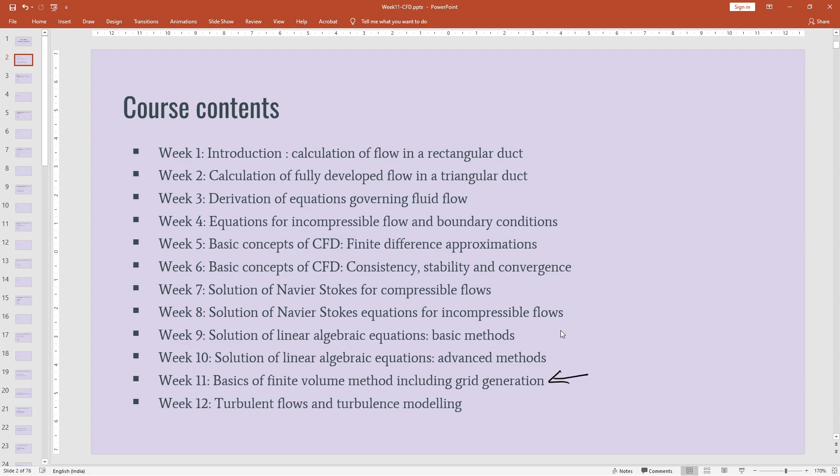Let's move on to questions. First question: for the solutions of Navier-Stokes equation in irregular geometries, which of the following grids can be used? Options are: first, Cartesian grids; second, structured grids; third, unstructured grids. Option A is both 1 and 2, option B both 2 and 3, option C all the above, option D only third one. You can inbox your answers.

Yes, the answer is right. We can use both structured as well as unstructured grids for Navier-Stokes equation for irregular geometries. So option B is the right answer.

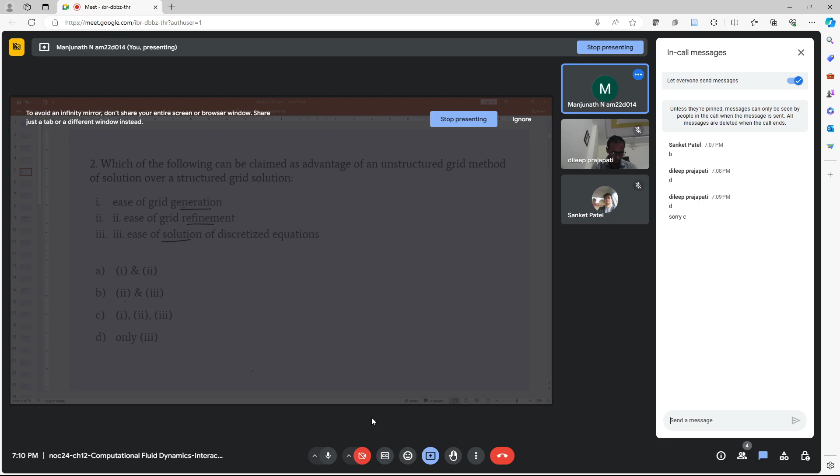So the three statements were ease of grid generation, ease of grid refinement, ease of solution. We have gone through the videos. For unstructured grids, ease of generation as such we can't say, but it's true to an extent that for irregular geometries, the grid generation will be difficult. But for other geometries, the unstructured grid can be easily generated, and also it can be easily refined.

But ease of solution won't be there, because even for a rectangular geometry, if I am using some triangulation discretization for 2D, for a 2D element, mostly it is triangular elements. So if we are using triangular elements for discretizing a geometry, for solving our algebraic equation, we will need some distances, some intercellular distances, and geometric properties from the mesh or cells taken into our system of equations.

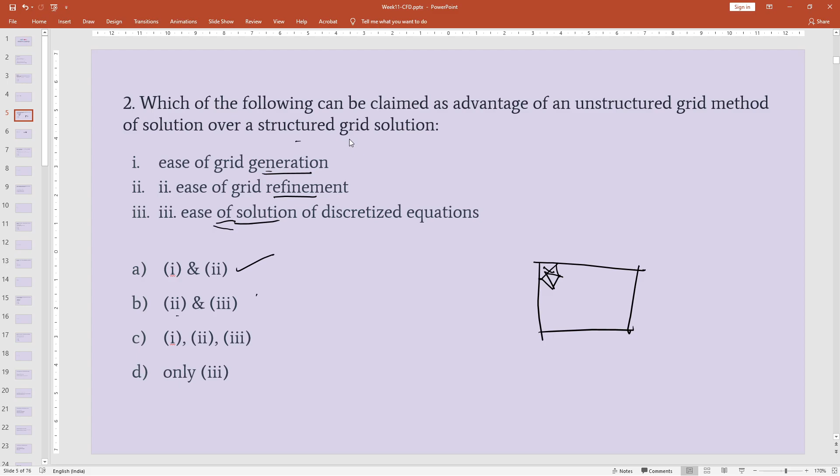Moving on to the next question: which of the following statements is not true when we use structured grid for flow through a complex geometry? The question is about finding a false statement regarding use of structured grid for a complex geometry. The statements are: first, body fitted grids can be used only on two-dimensional geometries; second, finite difference techniques cannot be used; third, the diagonal dominance condition of the coefficient matrix is preserved. Our options are: A, only third statement is false; B, both 1 and 2 are false; C, both second and third are false; D, all of the statements are not true. You can inbox your answers.

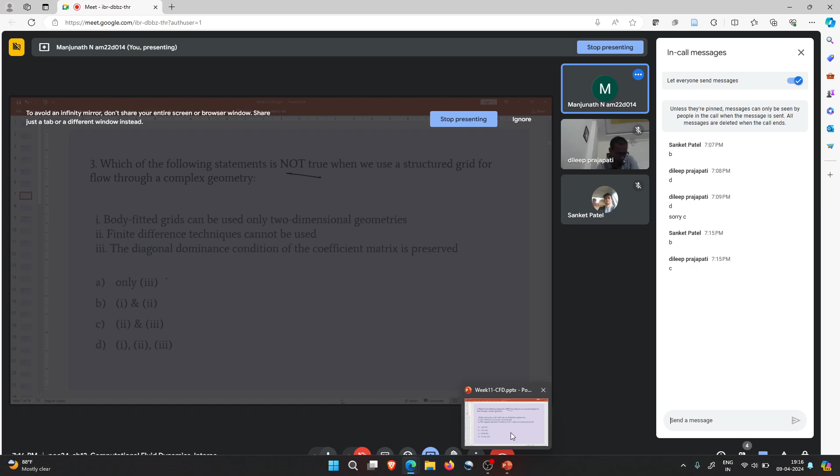Let's check the statements. First statement is body fitted grids can be used only on two-dimensional geometries. That is a wrong statement. We can use body fitted grids on three-dimensional geometries as well.

Second one is finite difference techniques cannot be used. It is not likely that finite difference methods cannot be used in any condition, but the issue is with the ease of generating structured grids that will match for finite difference techniques. So finite difference method can be used. Again, this is also a false statement. So 1 and 2, both of them are false statements.

The third statement is diagonal dominance condition of the coefficient matrix is preserved. So it is not preserved when we use body fitted grids. Initial generation of the coefficient matrix itself may not be diagonally dominant. We may have to do some preconditioning methods, something we have discussed last week, to make it diagonally dominant. So all of the statements are false. Our option is option D, that statements 1, 2, and 3 are false.

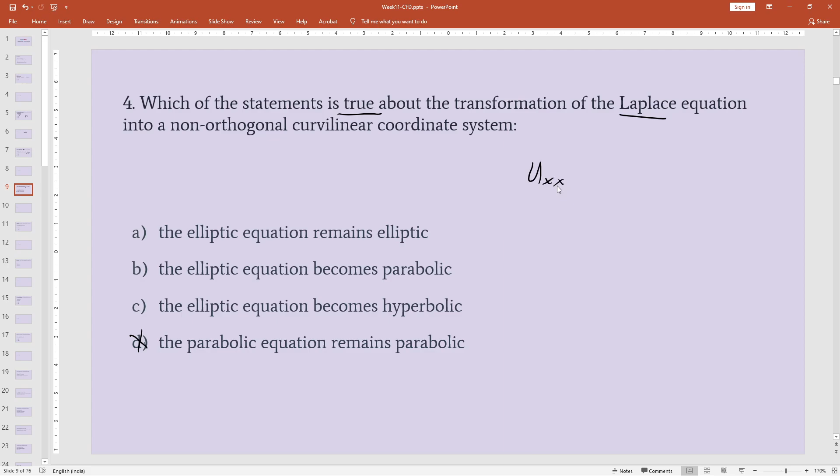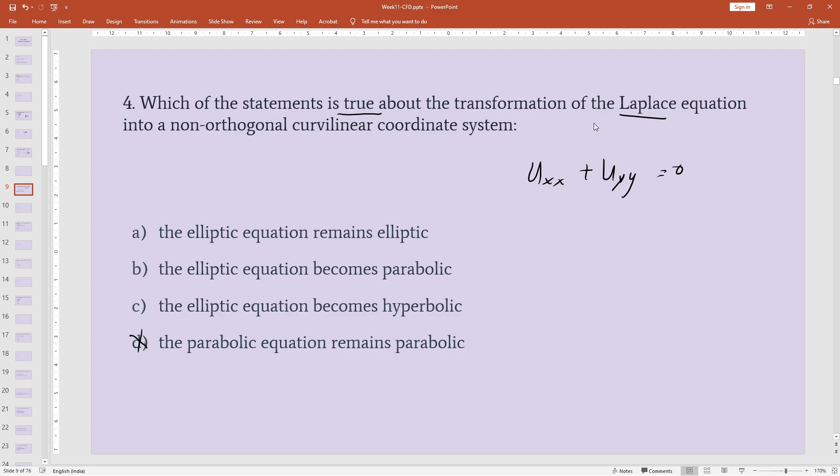Laplace equation, if you are taking in two dimensions, then uxx plus uyy is equal to 0. Even if you are transforming it into a curvilinear coordinate system, there won't be any additional terms or any first order terms coming to the equation. So it will remain elliptic. Our option A is the right answer.

Next question. Which of the following statement is true about ADI scheme, that is alternating direction implicit scheme? Statements are: it is an iterative method. Second statement, it requires diagonal dominance for convergence. Third statement, it can be applied to three-dimensional problems. So these are the three statements, out of which the question is to find true statements regarding ADI scheme.

Our options are: option A, first and second statements. Option B, second and third statements. Option C, first and third statement. Option D, all the three statements. You can inbox your answers.

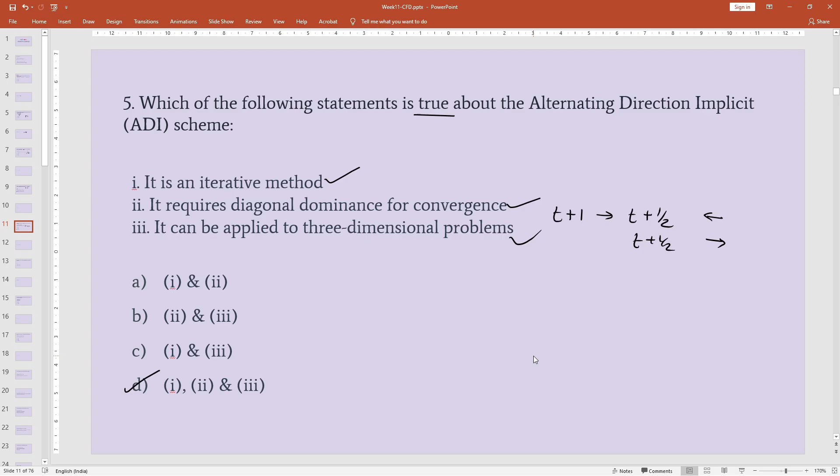Moving on to next question. For the solution of Ax is equal to B, which of the following decomposition of a matrix is the most implicit? So the question is about which decomposition is most implicit, that is, it will be having most number of terms in the current iteration steps. Options are LU decomposition, option B incomplete LU decomposition, option C LU plus N as in SIP,

So out of the three statements you can choose.

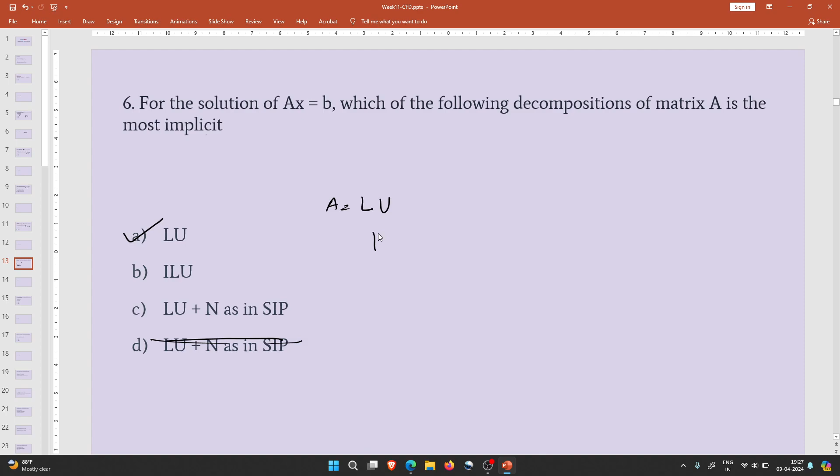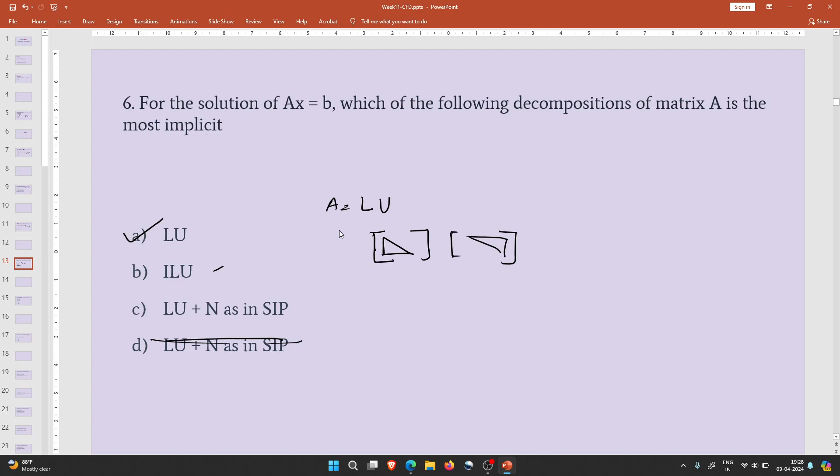Yes, you are right. Option A, LU decomposition method is the most implicit method where A is split into L and U, one lower triangular matrix and other upper triangle matrix. Here the number of elements in both L and U has to be solved. The number of non-zero elements will be greater, whereas in incomplete LU method, the number of non-zero elements are reduced.

Moving on to next question. The advanced iterative techniques are used primarily to enhance which of the following aspects of basic iterative methods? So the question is about why we need advanced iterative methods over basic iterative methods. Options are: to improve convergence condition, to improve convergence rate, and ease of computation. Which of these aspects are enhanced in advanced iterative techniques? Option A, 1 and 2. Option B, 2 and 3. Option C, 1 and 3. Option D, 1, 2 and 3. You can inbox your answers.

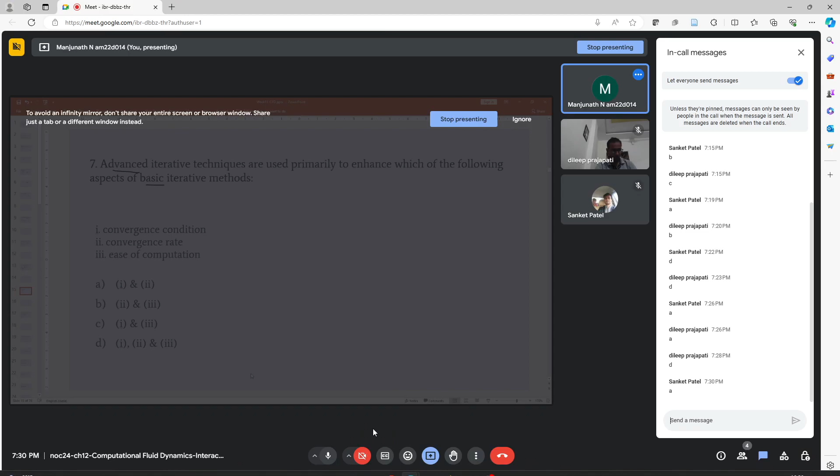So if you have gone through the videos, why we need advanced iterative methods, why we are iterating the solution, why we are iterating the system of equations. Iterating is to improve accuracy. Accuracy will be achieved if and only if the convergence is met. So our primary target is to improve the accuracy by improving the convergence.

So that's why we need advanced iterative techniques. But a lot of methods that we depend on for advanced iterative techniques, like preconditioning, and also some techniques use a lot of guesswork and some pseudo time loops. All such things will increase the computational process. So our primary target is to enhance the accuracy by improving the convergence. The first and second aspects are improved, while the ease of computation or the computational cost is something we have to compromise. So option A is our answer, that is 1 and 2.

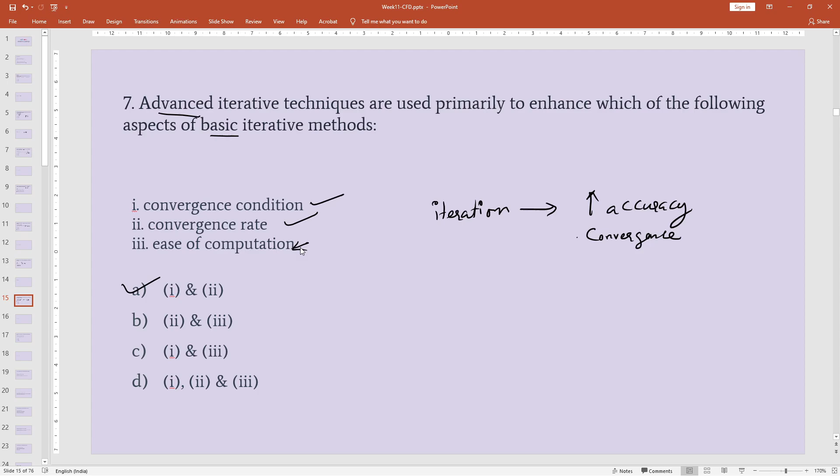Moving on to next question. Which of the following statements is true about multigrid method for solving Ax equals B? Statements are: it uses multiple grids for the same domain. Second statement: it uses multiple grids for the same equation. Third statement: it solves the same equation on all grids. Options are: first and second statement, option B second and third, option C first and third, option D first, second and third. We can look for answers.

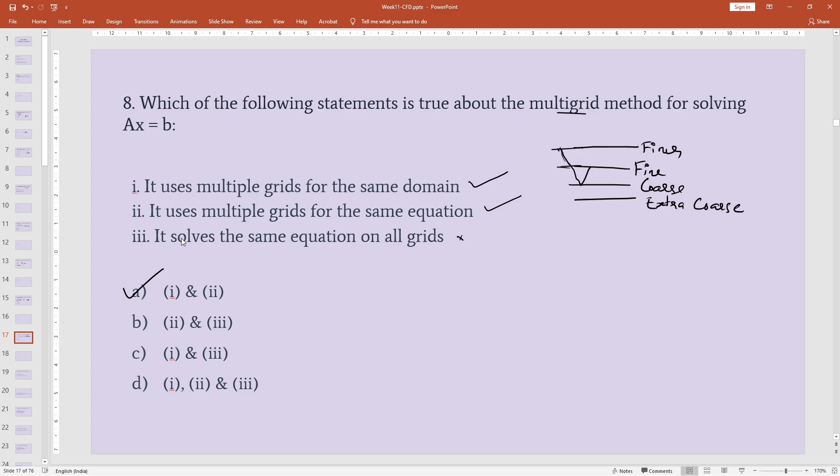Next question. In Delaunay triangulation method, the unstructured mesh generation is focused on which of the following? Options are: creating elements with good aspect ratio, minimizing the total number of elements, maximizing the volume of each element, or guaranteeing conformity with the computational domain boundary. So Delaunay triangulation method is the most used method for unstructured grid generation. So what is the principle behind Delaunay triangulation method is our question. You can inbox your answers.

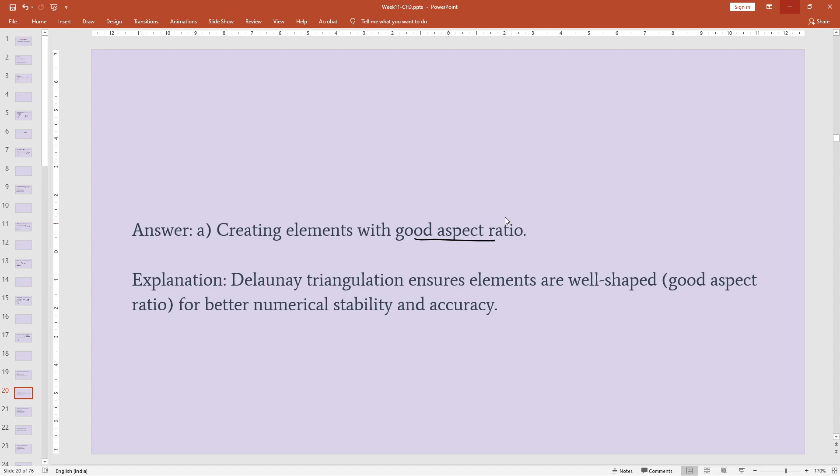In Delaunay triangulation, or why we choose triangles, we focus on creating triangles with good aspect ratio. The aspect ratio differs for different types of elements. If any side or geometrical proportion is way too skewed, it creates hurdles for the computational process. So a good aspect ratio is one of the required qualities for a mesh, and the Delaunay triangulation method ensures the mesh is refined for good aspect ratios.

Moving on to the next question. The advancing front method used for mesh generation is particularly useful for what? Options are: A, simple rectangle geometries. B, complex geometries with intricate boundaries. C, uniformly spaced grids throughout the domain. D, refinement of existing structured meshes.

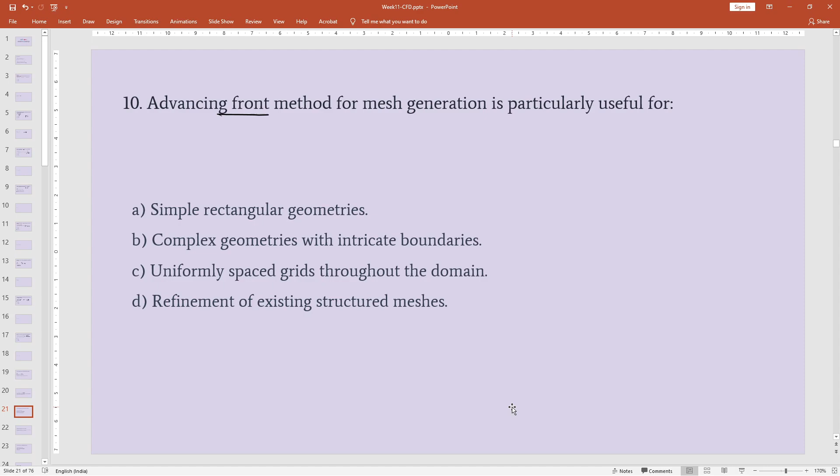Yes, you are right. The advancing front method can effectively handle complex geometries with intricate boundaries. The term itself denotes that it transforms or adjusts elements to conform to the boundary. It keeps adding or dividing elements until it is fully conformed with the complex boundaries. So such advancing front methods are well suited for complex boundaries or complex geometries.

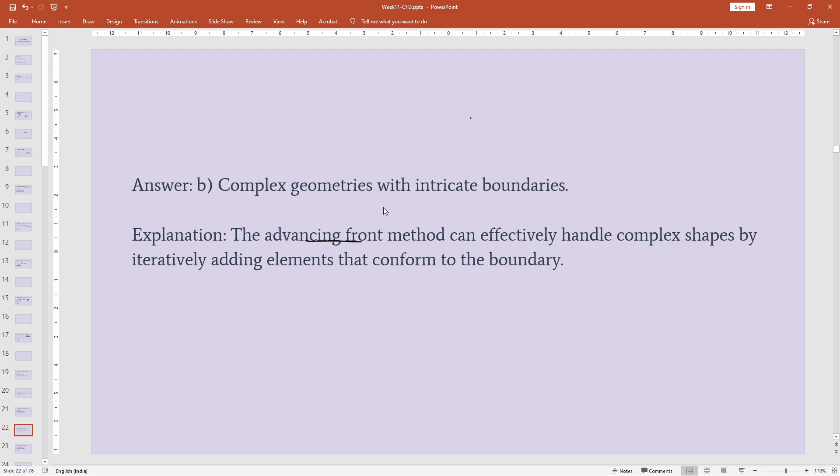Moving on to the next question. Octree-based methods for mesh generation are well suited for which of the following? Option A, generating highly anisotropic meshes. Option B, adapting the mesh based on the solution gradients. Option C, creating very fine meshes around small features. Option D, all of the above.

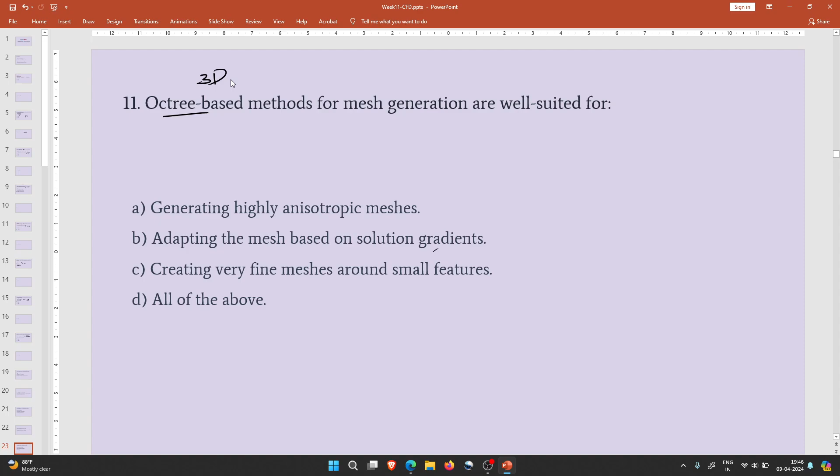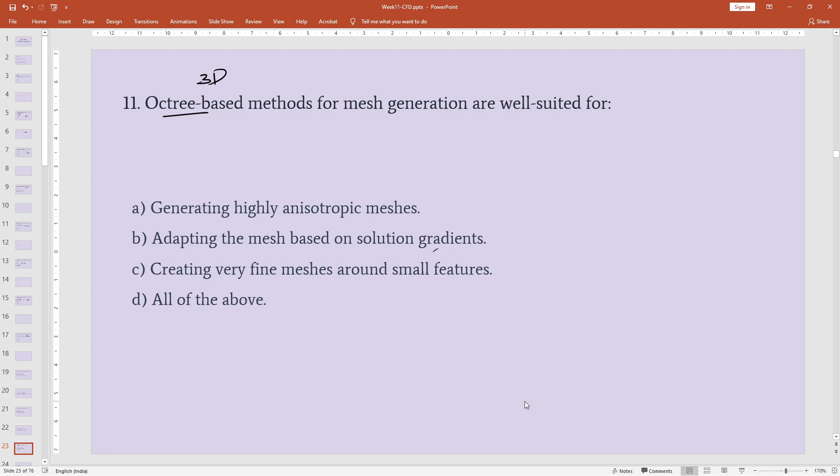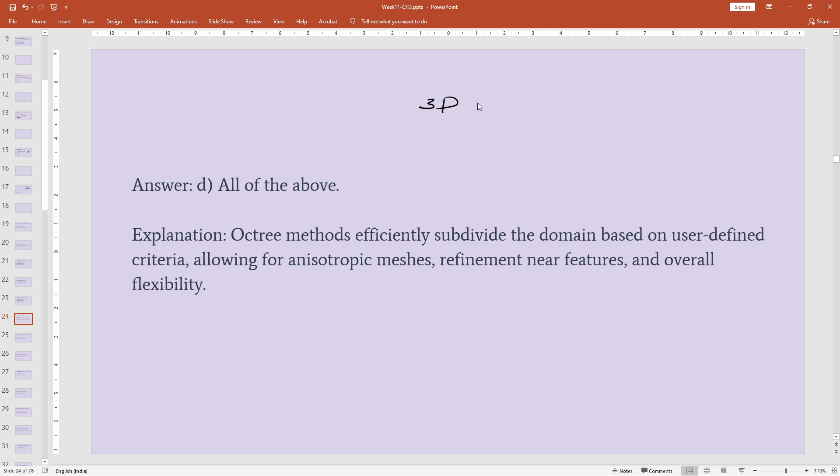Yes, you're right, all of the above. Octree-based methods can easily define anisotropic meshes, provide refinement near small features, and allow overall flexibility. The octree method is based for, as I said, 3D meshes mostly, and the basic structural unit is a cube. Octree, as you can spell it, is 'oct' meaning 8 and a tree structure. So if you have a structure, it divides it into 8 octants.

First we choose a domain and fit it into a cubical space, then it divides into 8 smaller cubes of varying size or section. Then this volume is again split, each element is split, so a tree-based volume splitting happens in the octree method. This allows the user to define anisotropic meshes as well as refinement and overall flexibility.

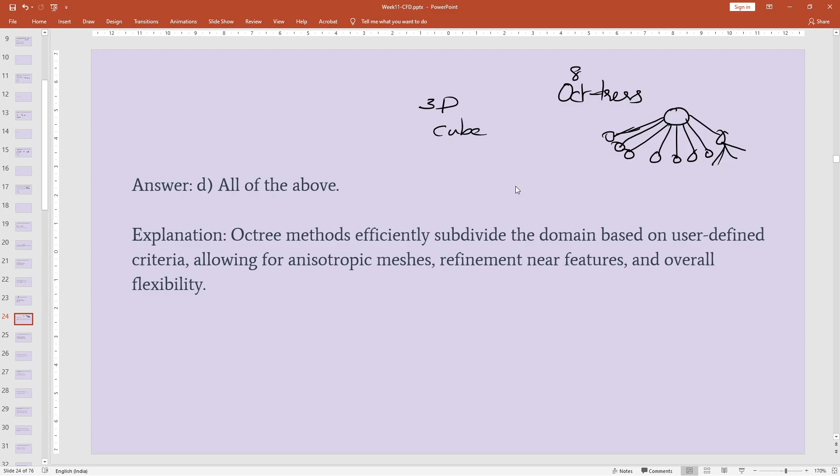Moving on to the next question. A key advantage of unstructured meshes compared to structured meshes in CFD is: Option A, they are always computationally more efficient. Option B, they can accurately represent complex geometries. Option C, they require less user input for mesh generation. Option D, they are inherently more accurate for all CFD problems.

You can inbox your answers. The question is about key advantages, that is, the most important advantage of unstructured mesh over structured mesh in CFD problems.

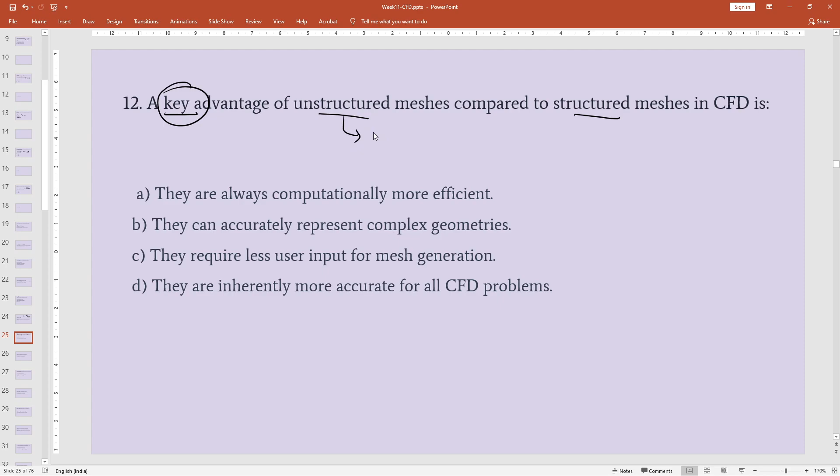Our question is on the key advantage of unstructured meshes, not just an advantage. So why do we need unstructured meshes at all, why can't we go with structured mesh? The main requirement of an unstructured mesh arises only when the geometry or computational domain is complex. Keeping that in mind, if you approach the options, we have only one option mentioning complex geometries.

We can confirm with the other options too. The first option says they are always computationally more efficient, but that's not true. As discussed in previous questions, solving procedures for unstructured meshes are difficult, since obtaining geometrical values from the constructed mesh itself is a tedious process which adds to the computational cost. So it is not computationally efficient.

The third option says it requires less user input for mesh generation. Comparatively, it depends; for a complex geometry, unstructured meshes will require less user input, so this is an advantage in the primary outlook, but the question is on the key advantage. The fourth option says it is inherently more accurate for all CFD problems. The word 'all' makes this false, it can be accurate, but not for all CFD problems, so option D is also false.

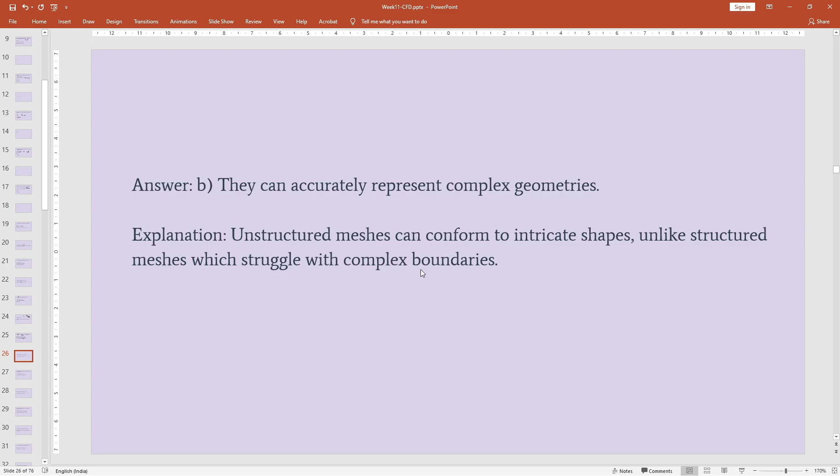Moving on to next question. When choosing an unstructured mesh generation method for CFD simulation, a crucial factor to consider is... Options: A, the total number of elements in the mesh. B, compatibility with the chosen turbulence model. C, the level of automation offered by the meshing software. D, the ability to capture the expected flow features. So the question is about what should be our main objective when we choose an unstructured mesh for our CFD simulation.

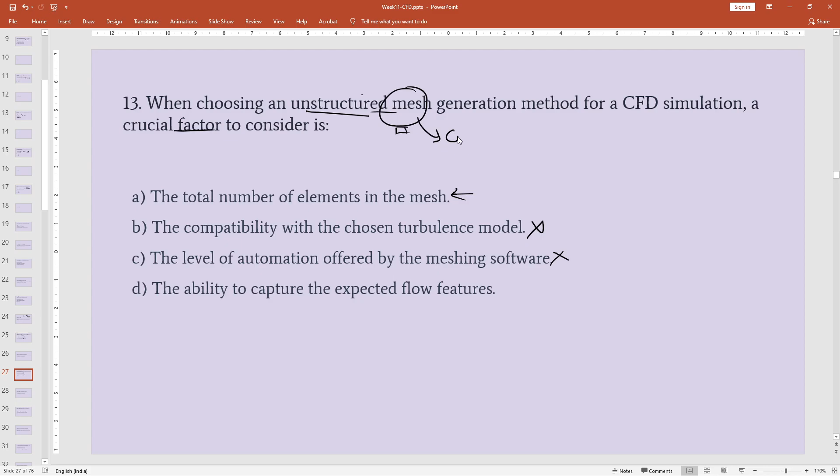So for any mesh, not just unstructured mesh, what we need first is to conform with our geometry. The mesh is what divides our computational domain into smaller domains. So first quality of the mesh is to conform with the physical boundaries of our domain or geometry.

Then next is the mesh refinement process. That's the second step of our mesh generation. That is done to capture the expected flow features, not just for unstructured mesh - it happens for structured mesh also. So our mesh refinement or improvisation is done to capture the expected flow features. Though this is our answer - option D is our answer.

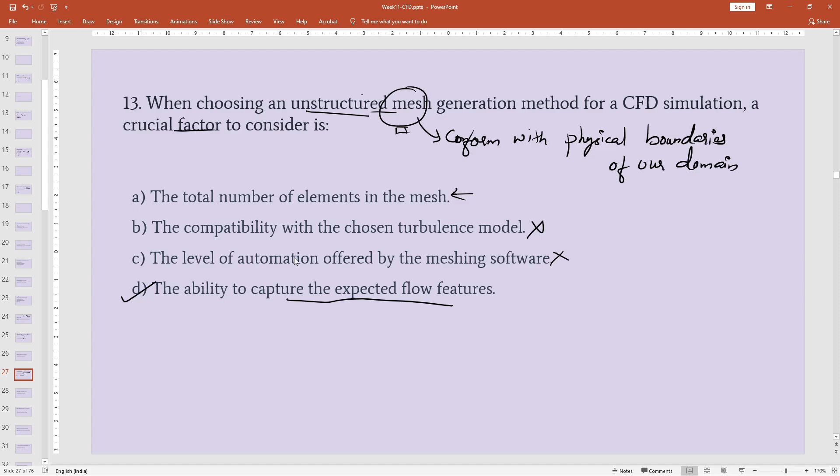Moving to next question. Which of the following statements about mesh quality is generally true for unstructured meshes in CFD? Option A, they always have better quality compared to structured meshes. Option B, they require more effort to ensure good element quality. Option C, they are inherently less accurate due to irregular element shapes. Option D, special care is not needed for mesh quality with unstructured grids. So the question is about which is a general fact or generally true for unstructured meshes in CFD. You can inbox your answers.

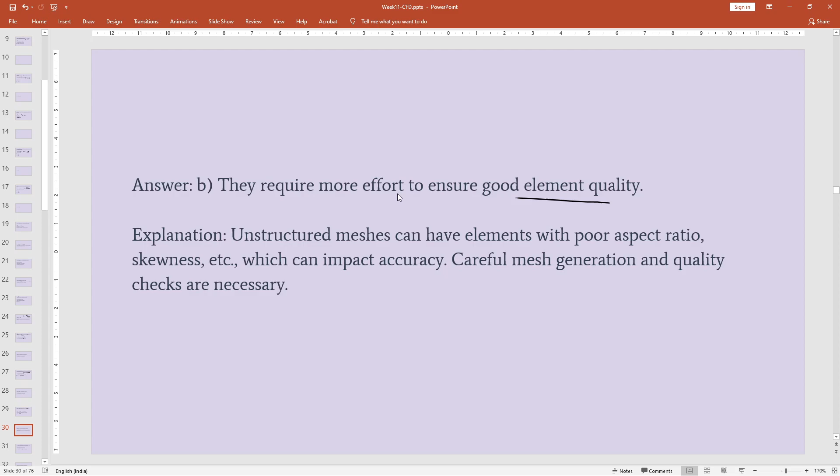Next question. A common challenge associated with unstructured mesh adaptation in CFD is: option A, maintaining good element quality after refinement. Option B, reducing the overall computational cost of the simulation. Option C, ensuring compatibility with the chosen flow solver. Option D, imposing complex boundary conditions on the adapted mesh. The question is about the key challenge or the most important limitation of unstructured mesh.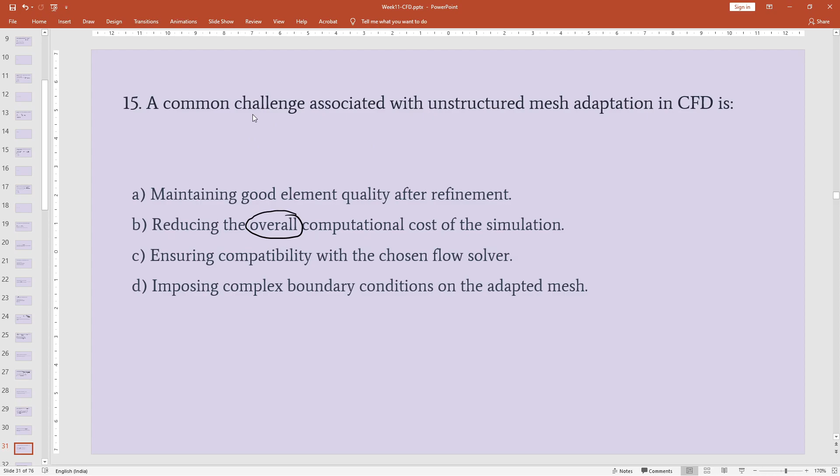If you go through the options, option B is reducing the overall computational cost of the simulation. If that term wasn't there, option B would be our answer. But the question is about the common challenge of unstructured mesh adaptation. Overall computational cost doesn't just depend on mesh creation, it depends on the solving scheme and a lot of other factors. So reducing overall computational cost is not our common challenge - our primary need from a simulation is to get good results.

So the next target is to achieve good results with less computational cost. For getting good results, what we will be doing is refine our mesh, or refine our computational domain, such that the mesh will capture all the required physical flow phenomena to our required accuracy. That term should be remembered - required accuracy.

We can choose to which accuracy we need our results. So the computational methods and the mesh, as well as the methods, should ensure it is giving the required accuracy.

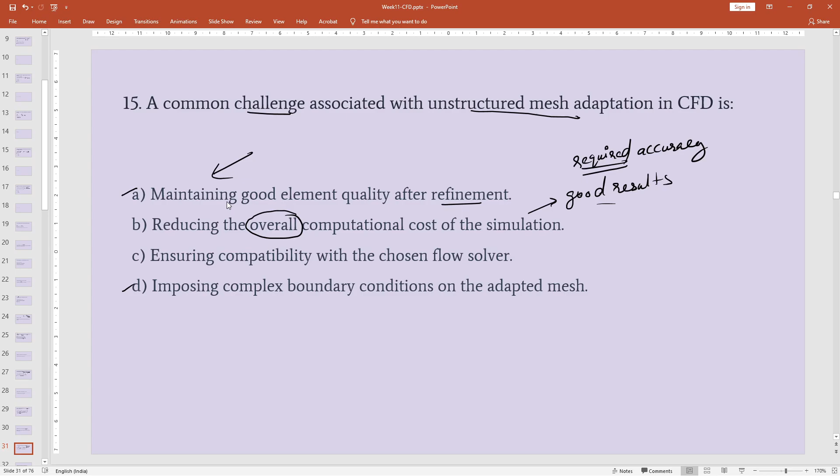If you go through all these options, only two things are directly related to the meshes, option A and option D. From these two, option A is the most important challenge because we know we will be refining our meshes in successive cycles, but with unstructured mesh, the element will be split with some crude or limited input. Suppose we give minimum element size - we will be reducing the side length of a particular cell. While doing that, there is a high chance that in unstructured meshes, highly skewed or poor quality elements will be generated during refinement compared to structured mesh. So maintaining good element quality in unstructured grid is the primary task related to unstructured mesh adaptation in CFD.

The second option was true if the term 'overall' was not there.

Moving on to the next question. In unstructured mesh generation, the process of assigning material properties to each element is referred to as - option A, mesh refinement; option B, boundary condition assignment; option C, meshing convergence; option D, cell tagging.

Comparatively simpler question. The process of assigning material properties to a cell or element is referred to as which of the following? You can enter your answers.

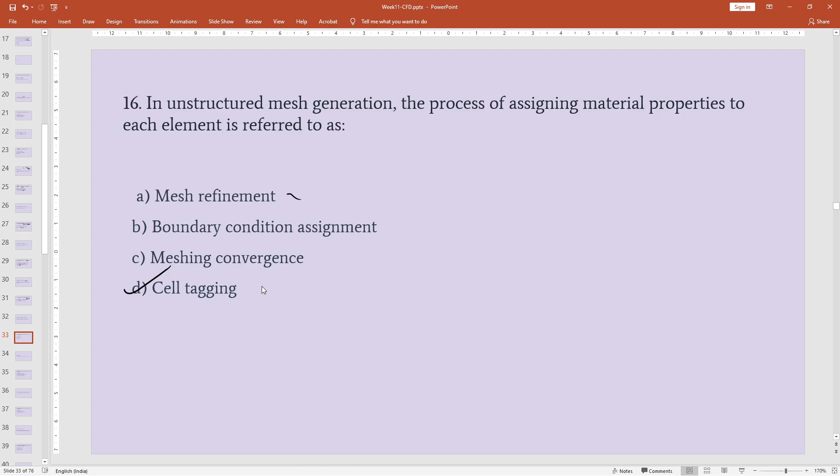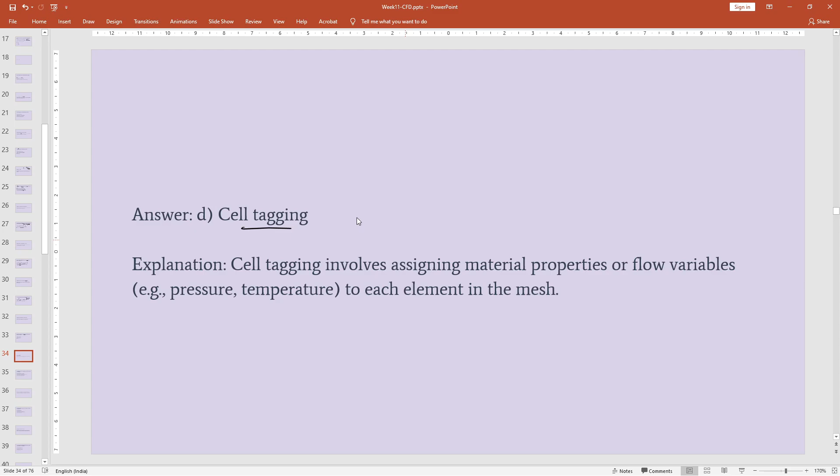Next question. In the advancing front method for mesh generation, how does the front progress through the geometry? Options are: A, randomly selecting points within the domain; B, iteratively adding points to the boundary and advancing inwards; C, dividing the domain into predefined subregions; D, sweeping a structured mesh across the geometry.

The concepts we have already discussed in the previous question. This question is on the method of how the front progresses in the advancing front method.

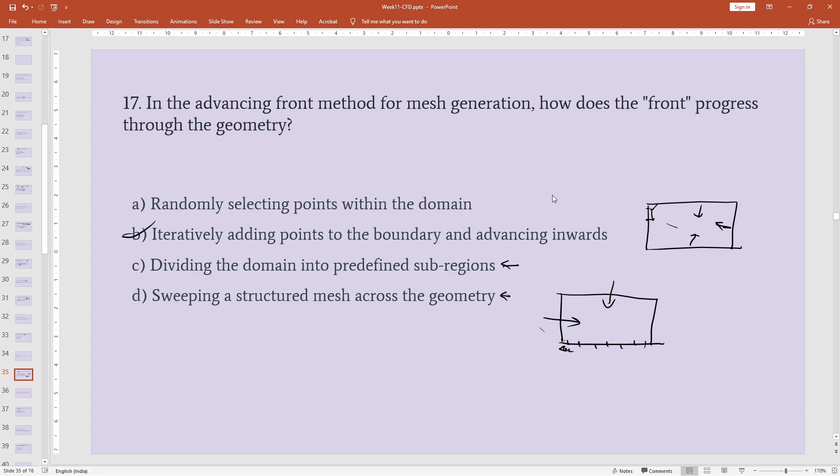Sweeping a structured mesh across the geometry is the most basic meshing method when we do it manually. If we have a rectangular region, we can divide it into some particular element. Then it will be swept in some direction, creating meshes in that direction. So all these are different methods to create meshes, but for advancing front geometry, option B is the right answer.

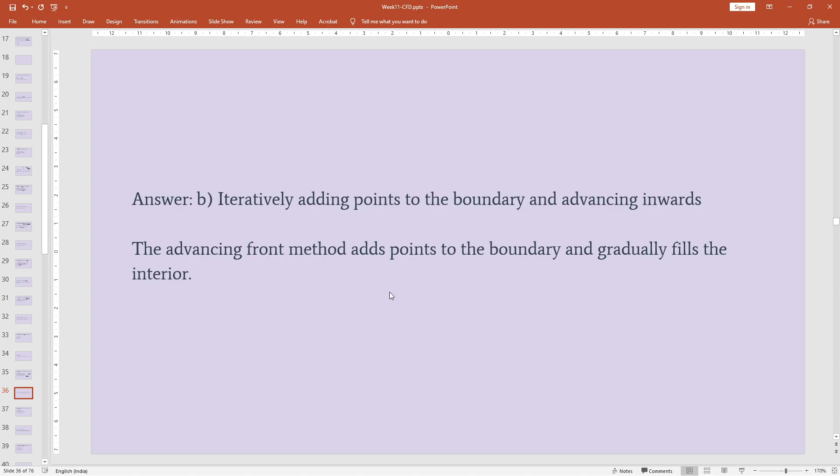Next question. The primary advantage of a body fitted grid in CFD compared to a Cartesian grid for complex geometry is option A, reduced computational cost; option B, improved accuracy near boundaries; option C, simpler implementation of boundary conditions; option D, easier mesh generation process.

So the question is about the advantage of body fitted grid over Cartesian grid for complex geometries.

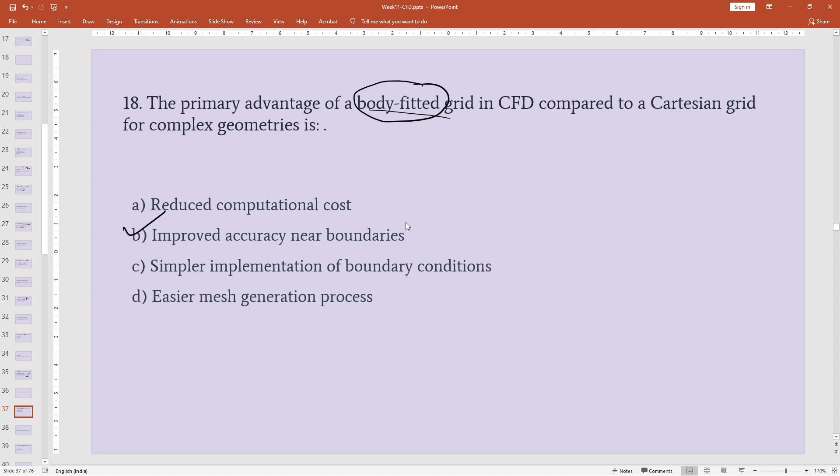Yes, you are right, option B is our answer. The question is intuitive since it's on body fitted grid. Why do we need body fitted grid? We need it to capture or conform our grid to the irregular boundaries, so as to get improved accuracy near the boundaries. There are flow phenomena of much importance at the boundary regions, requiring more accuracy, and body fitted grid ensures that compared to a Cartesian grid. The computational cost is more for body fitted grids, implementation of boundary conditions is not easy, and mesh generation is also tedious compared to Cartesian grid. So the only primary advantage of body fitted grid is improved accuracy near boundaries.

Near boundaries, our flow gradients will be high. To capture these high gradients of flow, we need improved accuracy near the boundaries.

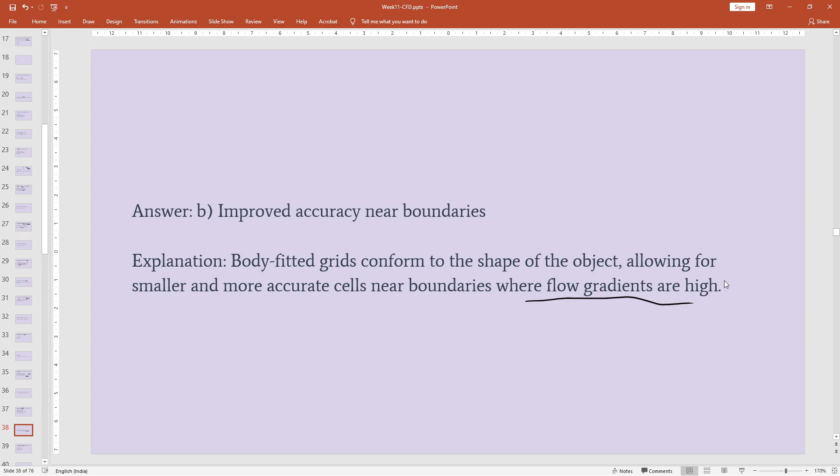Next question. A well-designed body-fitted grid should have minimal skewness in its cells. What is the negative consequence of highly skewed cells? Options are: A, increased computational efficiency; B, improved flow visualization; C, reduced accuracy of flow solutions; D, easier post-processing of the results.

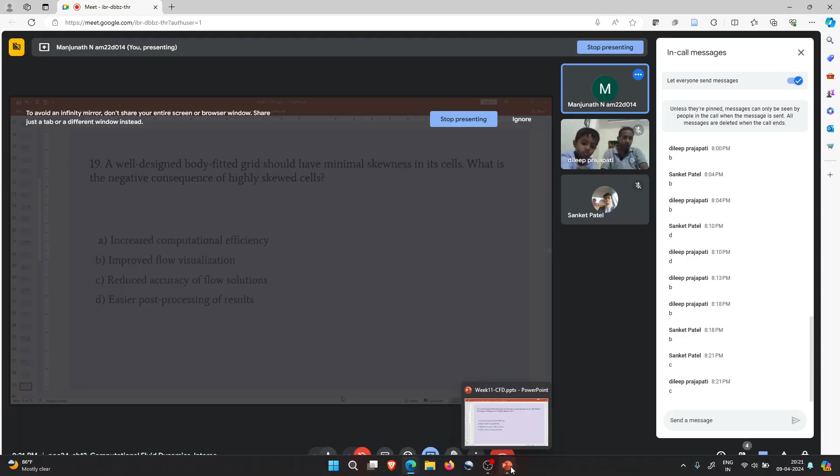A simple question. You can inbox the answers. The question is so simple, please answer. Option C is our answer.

The key is in the question itself. It says minimal skewness is needed, and if it is highly skewed, it should only create an adverse, negative consequence. All the options other than C give some good result or good consequence - increased efficiency, improved visualization, easier post-processing. These are positives. The only negative consequence is option C, reduced accuracy of flow solutions.

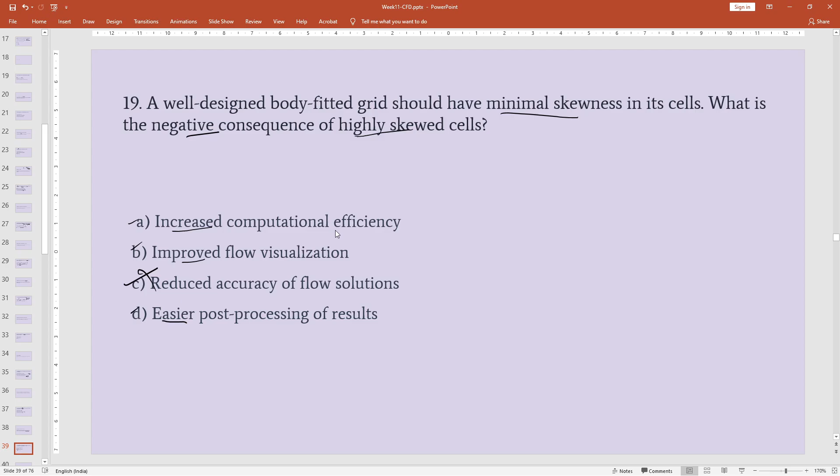So this is my question. It's not just for body fitted grids, any grids or meshes - if the skewness is high, it can introduce numerical errors that will affect the convergence as well as the accuracy of the solutions.

Next question. Chimera grids are a type of body fitted grid used for option A, simple geometries with smooth curves; option B, overlapping or intersecting objects; option C, highly viscous flows with large velocity gradients; option D, turbulent flows with complex vortex structures. The question is on a typical variety of body fitted grid, that is Chimera grid. You can inbox your answers.

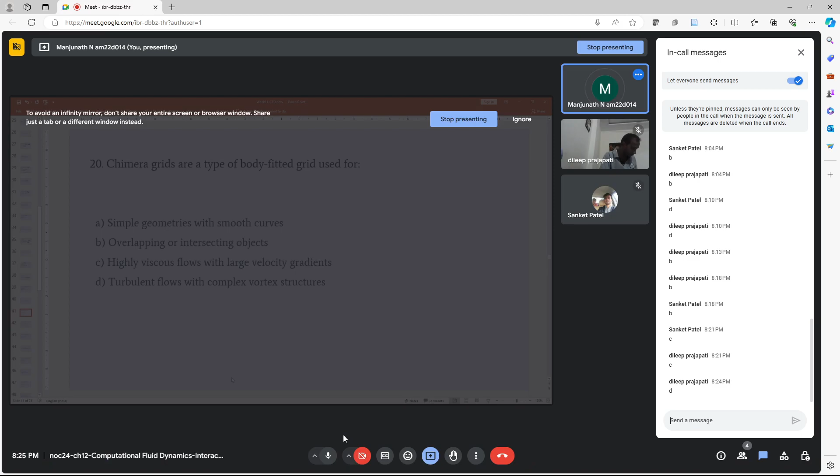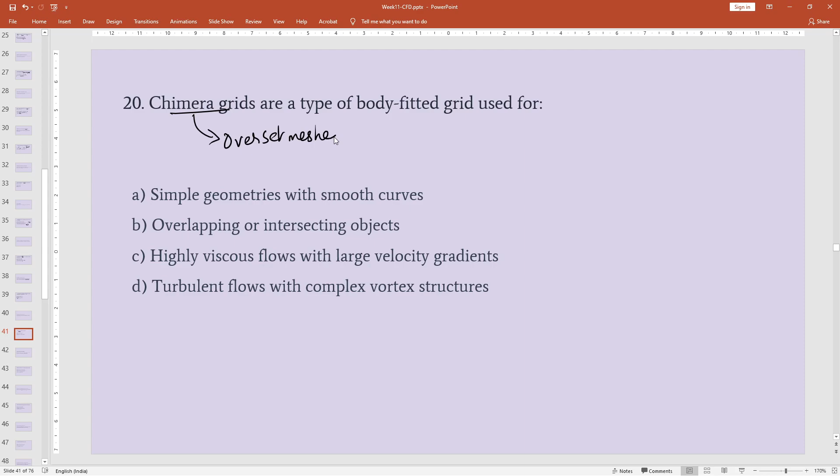If you remember our third week's interaction session, we have already discussed Chimera grids. Chimera grids is an example of overset meshes. If you remember that much, it was easy to answer the question - just find this 'oversetting' in the options. So option B is our answer, that is overlapping or intersecting objects.

For simple geometries with smooth curves, we don't need Chimera meshes. In our third week session, I showed all the different types of meshes and what an overset mesh is. So Chimera mesh is a classic name for overset mesh, one variety of overset mesh, which is also a body fitted mesh.

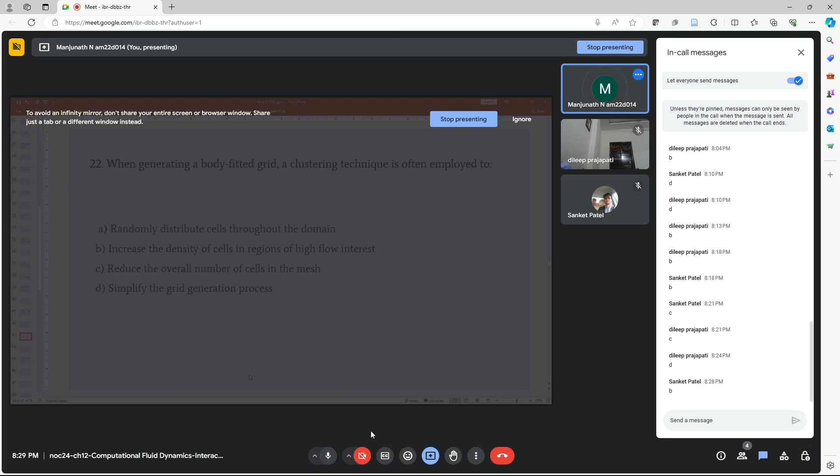Yes, you are right. Option B is our answer: to increase the density of cells in the regions of high flow interest. It's intuitive from the question itself, it's a clustering technique. Clustering means increasing the number of cells in one particular region. So in body fitted grids, the clustering technique is the method by which we add or increase the number of cells in particular regions of interest to capture the finer details of complex flow phenomena.

Next question. Compared to structured body fitted grids, unstructured body fitted grids are generally: Option A, more efficient for complex geometries. Option B, easier to generate automatically. Option C, more accurate for higher order numerical schemes. Option D, less prone to numerical errors. So it's a comparison between structured and unstructured body fitted grids. You can inbox your answers.

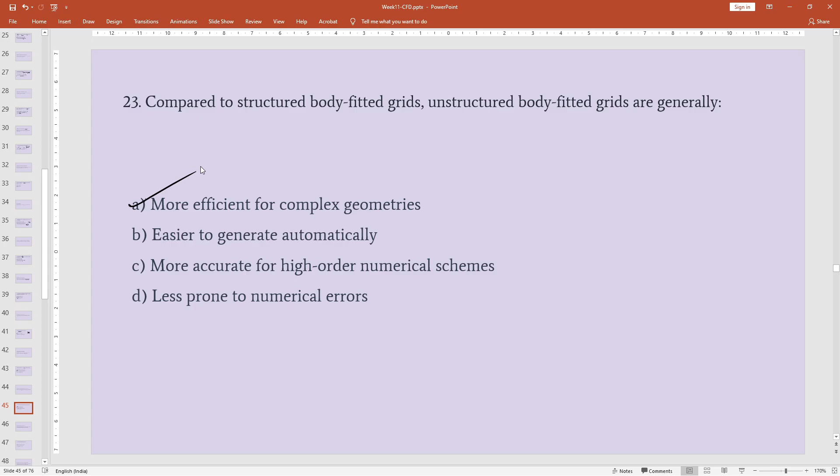Yes, again simple question. Option A is our answer: more efficient for complex geometries. Unstructured grids can easily conform to the intricate boundary shapes of complex geometry, which makes it more efficient for complex geometries.

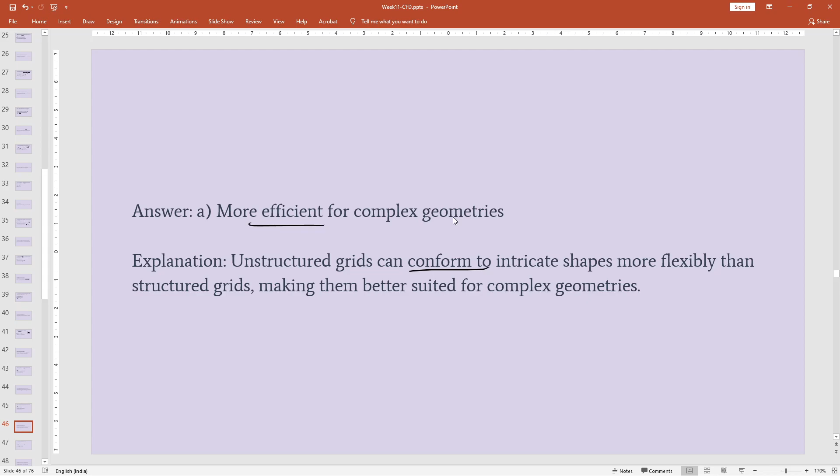Next question, again on body fitted grids. The major challenge associated with body fitted grids is: Option A, high computational cost due to complex grid generation. Option B, difficulty in implementing turbulence models. Option C, inability to handle moving boundaries. Option D, limited applicability in inviscid flows. You can inbox your answers.

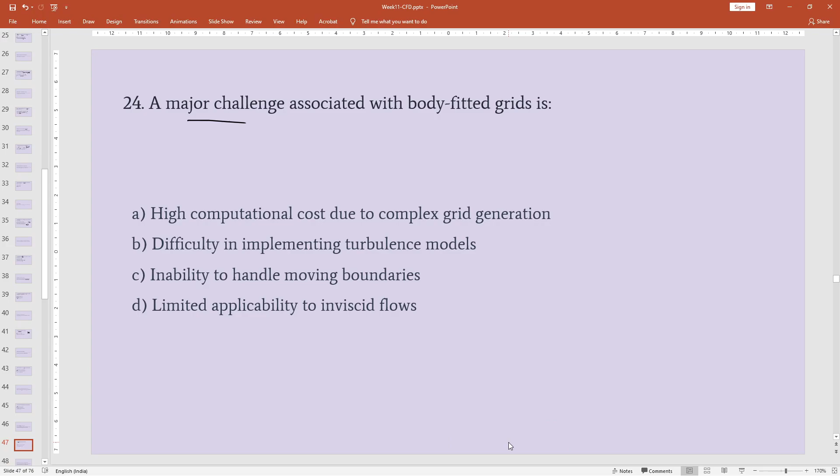Yes, you are right. High computational cost due to complex grid generation. So when we need to create refined unstructured body fitted grids, the computational cost or meshing cost itself becomes high compared to other meshes.

Next question. Mesh adaptation is a technique used with both structured and unstructured grids. What is the main purpose of mesh adaptation? Options are: Option A, reduce overall mesh size for faster simulations. Option B, improve accuracy in areas with changing flow features. Option C, ensure all elements have the same aspect ratio. Option D, simplify post-processing of CFD results.

Mesh adaptation involves both refinement and coarsening, not just refinement of the mesh. Mesh adaptation includes refinement as well as coarsening. So what's the purpose of mesh adaptation? You can inbox your answers.

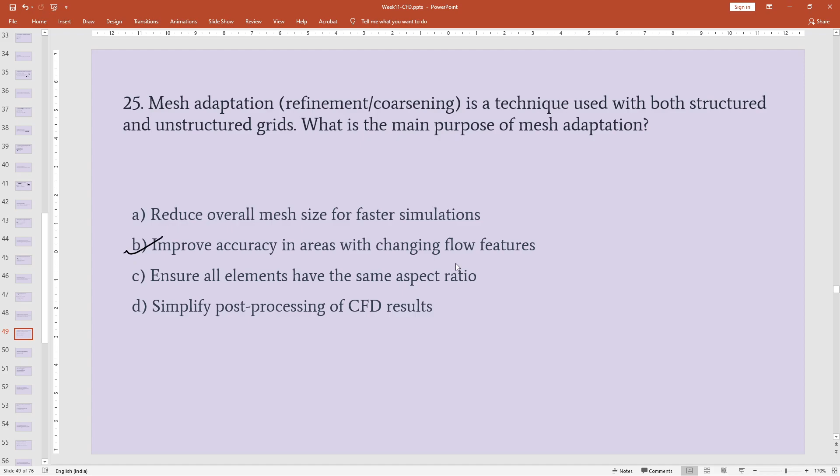So you are right. Option B: to improve the accuracy in areas with changing flow features. In our computational domain or geometry, there will be areas or regions where the flow features will be different. For such cases, we can use mesh adaptation.

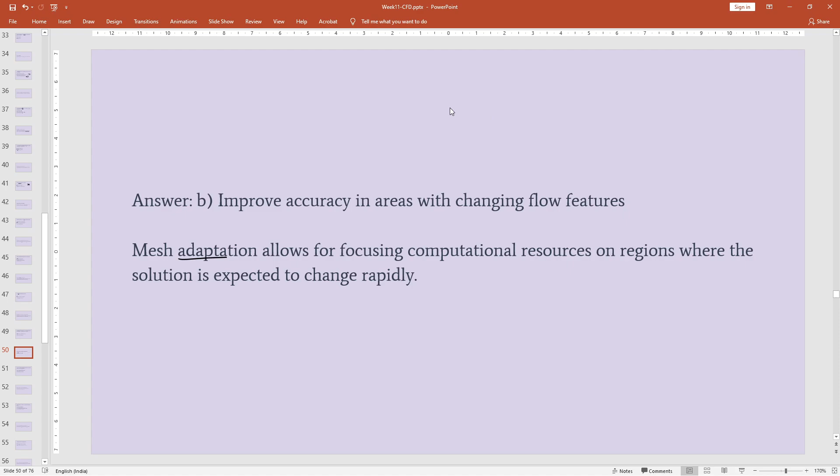For example, suppose in some regions we have something like this: we believe this portion has more flow gradients compared to other two regions. I am naming them A, B, and C. We feel like B has more flow features or flow gradients happening compared to other regions, so we can refine region B with respect to A and C to capture these things.

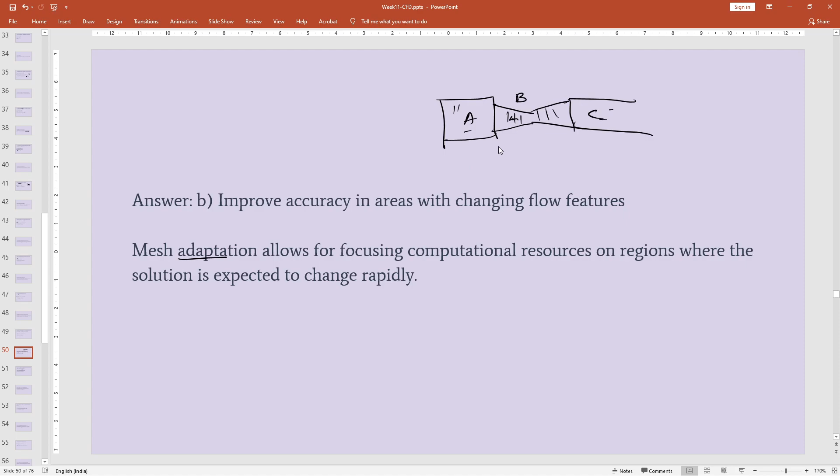Again, comparing A and C, if we believe we are more concerned about the results in region C rather than A, then we can comparatively have a coarser mesh in A compared to C. That selective refinement and coarsening is what is called mesh adaptation. This is done for two things: to improve accuracy as well as reduce computational cost. So if region A is larger compared to others and we don't particularly require flow details in A, we can use a coarser mesh, which reduces computational cost. But results from region A may still be required to solve B and C. So in such a condition, we go for a coarser mesh in A and corresponding levels of refinement in B and C.

Some smoothing methods will be used in the regions of these meshes when the flow is happening from a coarser region to a finer region. The only thing we should keep in mind, or should check, is the transition regions. The geometry as well as the solution solving schemes should follow some smoother methods so that there is not an abrupt jump in the results or in the methods.

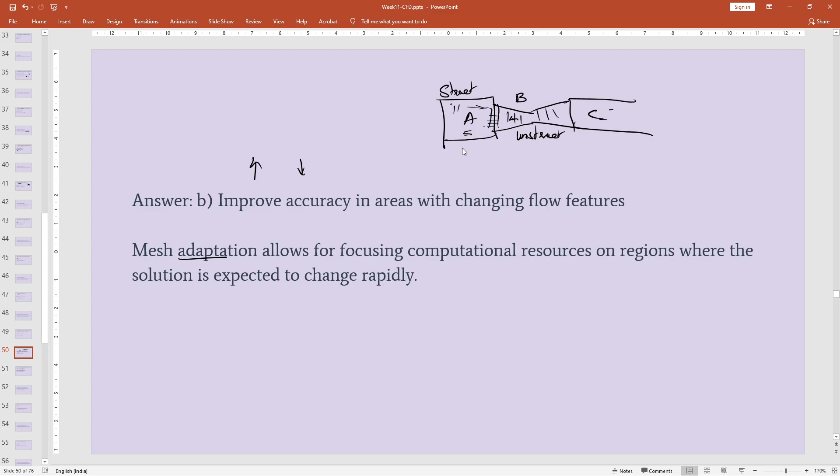Yes, you are right. Option B, that is, simplifies the mesh generation for complex geometries. Again, as in the previous example, you can use some structured mesh here, whereas unstructured mesh here. So depending on the complexity of the parts or regions of a complex geometry, we can choose structured and unstructured grids for different regions of the same domain.

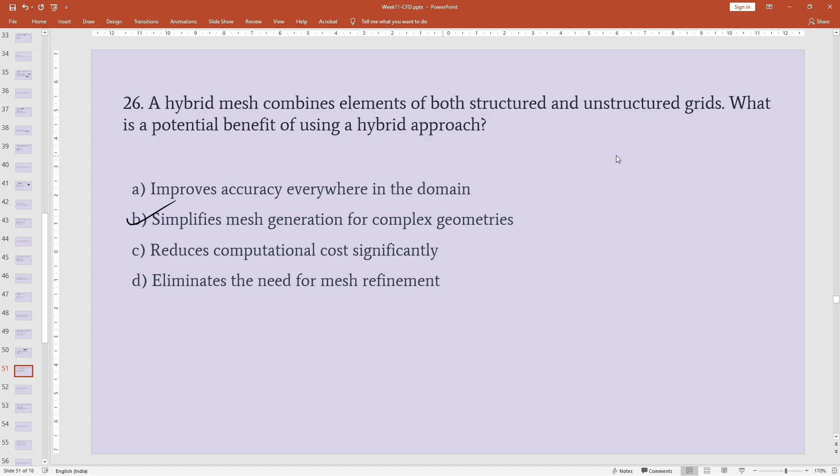So we have a large domain like the manifold discussed in our lecture videos. We will be having a larger computational domain. Some parts of it will be comparatively simpler or regular compared to other portions. In such portions we can use structured grids, and the portions having highly irregular boundaries, ellipsoid, circular, or such complex boundaries, there we can go for unstructured elements. Using this method simplifies the mesh generation, because if you follow either structured or unstructured mesh for the entire geometry, it will definitely increase the complexity of mesh generation.

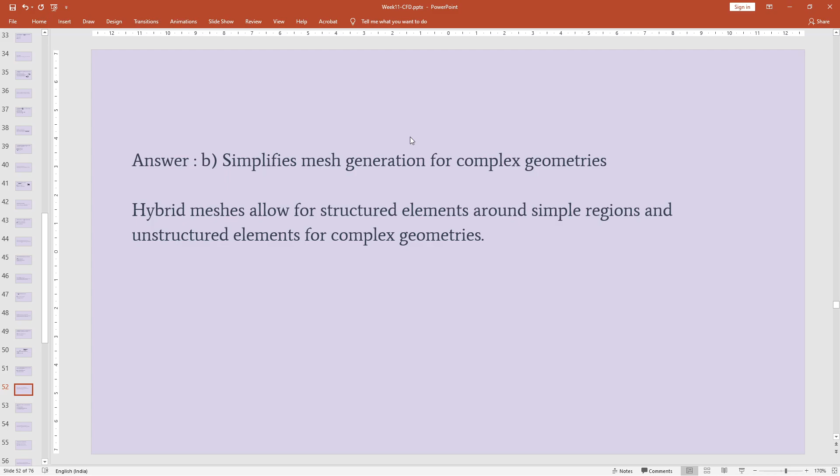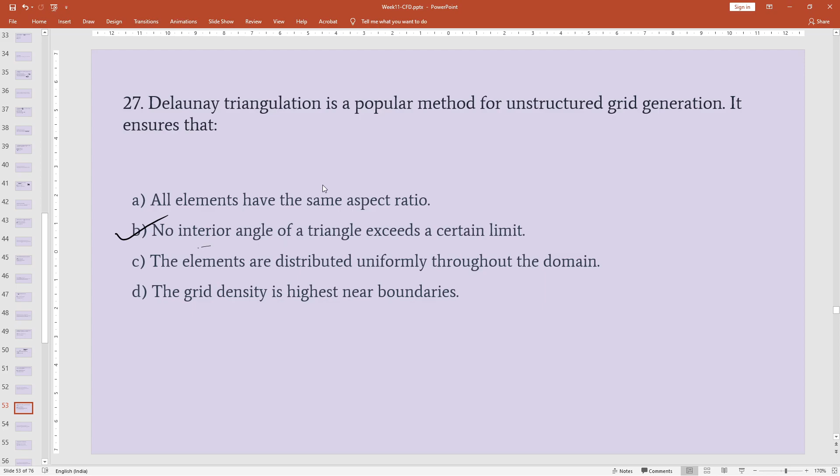Yes, option B is our answer: no interior angle of the triangle exceeds a certain limit. It's a somewhat simpler question because for a triangle, the first thing we can fix limits on is the interior angles. Another method, for area-based approach, is to minimize the circumradius. If you have a triangle and fit a circle over it, the radius of that circle is called the circumradius. So minimizing circumradius is another method, and we set limits for the interior angles of the triangles in the Delaunay method, because if the interior angle becomes excessively acute or obtuse, the skewness of the element will be affected, which will result in poor results.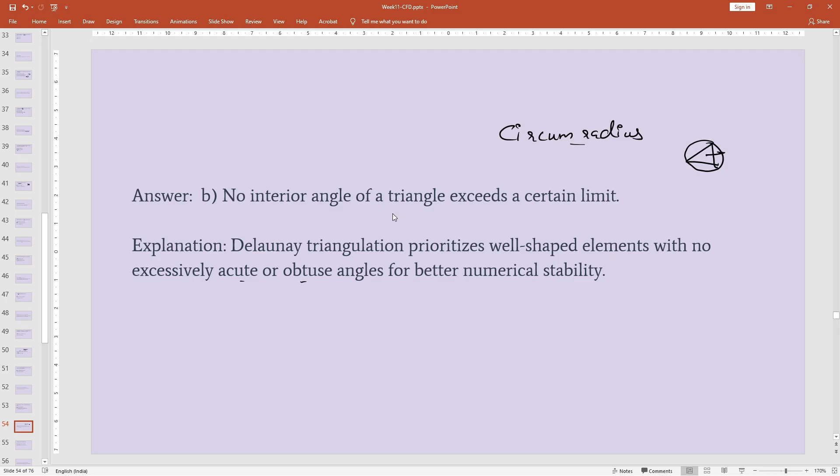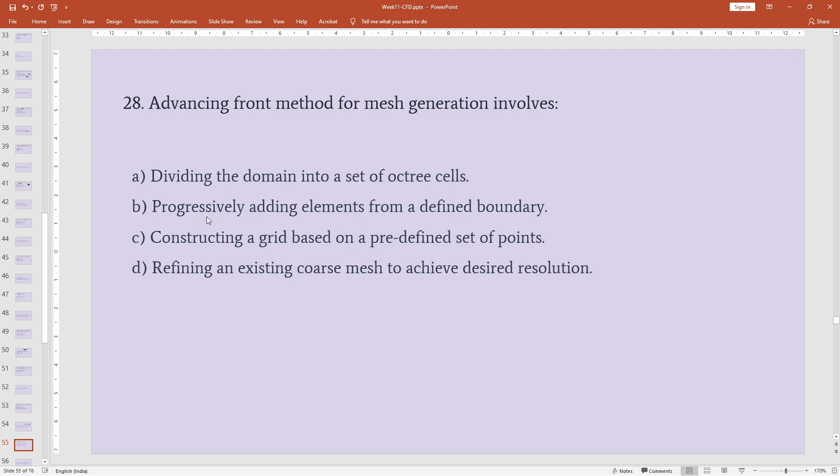This we have already discussed in a previous question, so we can just skip this. Advancing front method mesh generation involves progressively adding elements from a defined boundary, which we have already discussed.

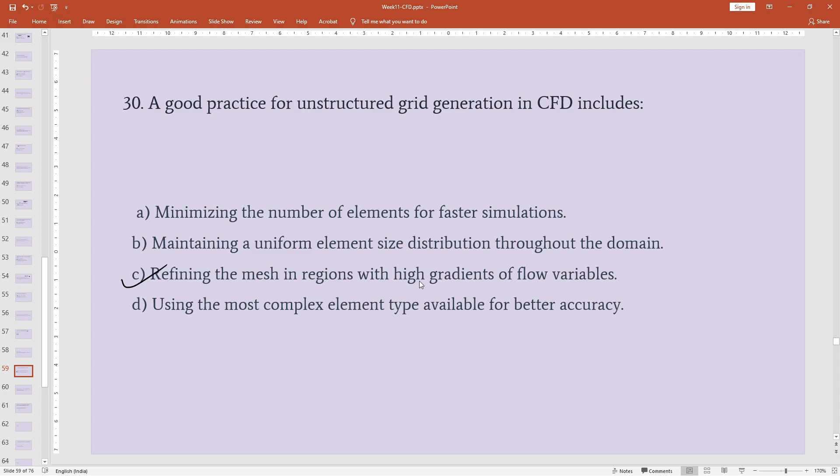Similar question we have already discussed, you can run it quickly. Yes, option C: to refine mesh regions in high gradients of flow variables. In unstructured grids, we can choose to have finer mesh in some regions and coarser meshes in others. So such mesh adaptation is the primary property we should aim for in an unstructured mesh.

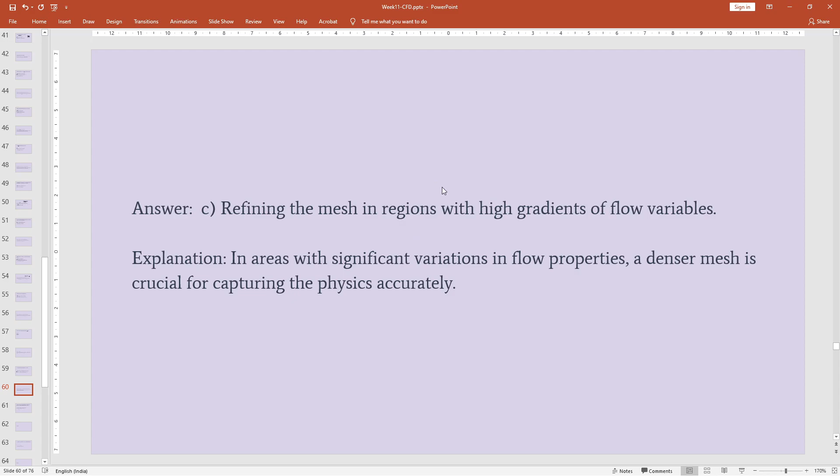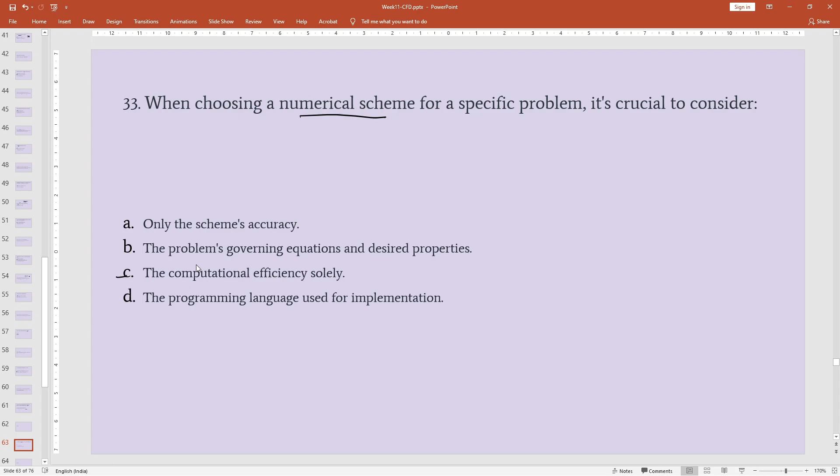Our answer is option B, the problem's governing equation and desired properties. When choosing a numerical scheme, it should reflect or capture the governing equation, that is the partial differential equations. Whereas computational efficiency is mostly taken care of in the iterative methods - when we are iterating, the computational efficiency, mostly, I'm not saying entirely, is mostly taken care there.

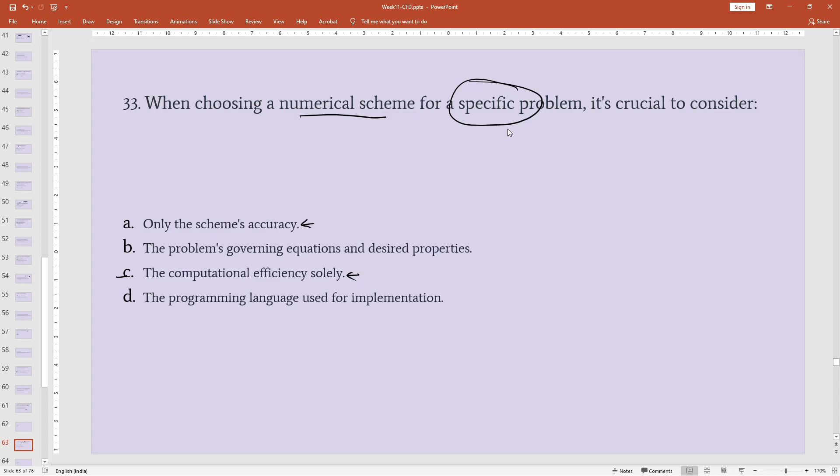And scheme's accuracy - not just the scheme accuracy, overall accuracy depends on the entire method, not just the numerical scheme. But when we are solving a flow problem or CFD, the numerical scheme should capture our underlying physics. So for a specific problem, this is not a general thing; the physical phenomenon driving that flow should be captured well by the numerical schemes.

Next question is on von Neumann stability analysis. The von Neumann stability analysis analyzes the amplification factor of a numerical scheme. What does the amplification factor greater than 1 indicate? Simple question, you can answer quickly.

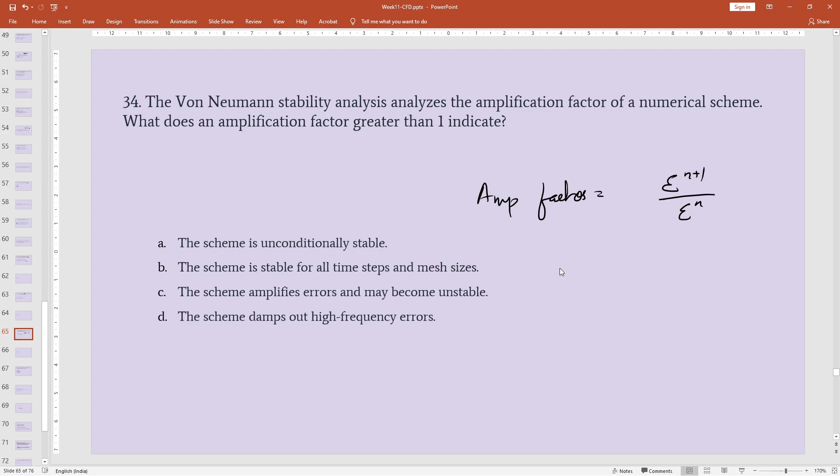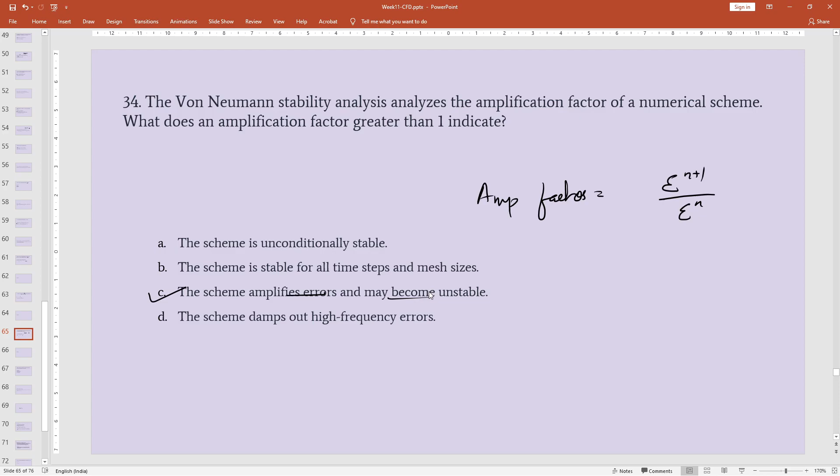Yes, you are right. Our amplification factor is a ratio of error in the n plus 1th step by error in the nth step. So if it is greater than 1, that means the error is growing. It implies that the scheme amplifies the errors and it can become unstable. It should be more conclusive to say it will become unstable, but we can only say that it can become unstable. Our option is option C.